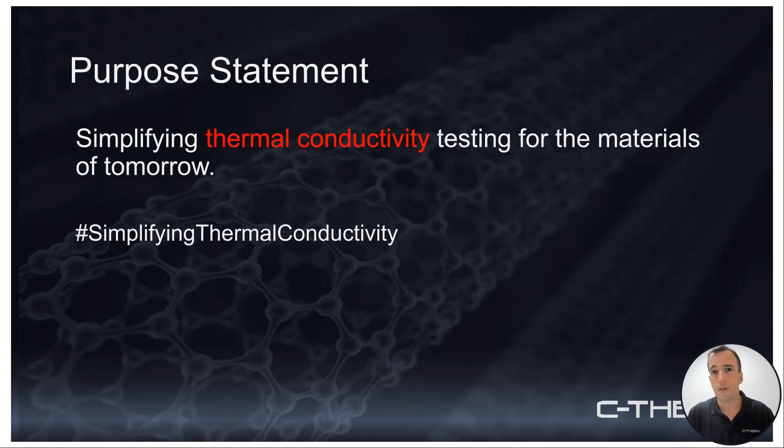Quick overview of our product line. This is not a commercial presentation - we're really going to focus more on the application space, but I just want to give you a little sense of the landscape.

You'll see Trident featured in the middle here, featured quite a bit in the content that Arya will be presenting, specifically the MTPS sensor. Trident brings together the three most prominent methods for thermal conductivity, and a lot of the strength of the product is based in that flexibility and being able to have different options available to you. When we talk about thermal conductivity, it's really important to have more of a toolbox approach - different methods have different benefits and biases or limitations.

Something that's really important quite often for different labs is to have some flexibility, to have some different sensor options. Trident really accomplishes that nicely. You'll see a strong focus on the single-sided MTPS sensor, which is that stainless steel cylindrical sensor to the front right of the pyramid. You'll also see some reference to the TPS flex sensor, which is the yellowish sensor to the left.

This is also great for concretes and really hard materials. You sandwich that in between two samples, and it provides a really complementary means of testing some of those harder materials. So Trident is a research grade product, and it is our most popular product to date.

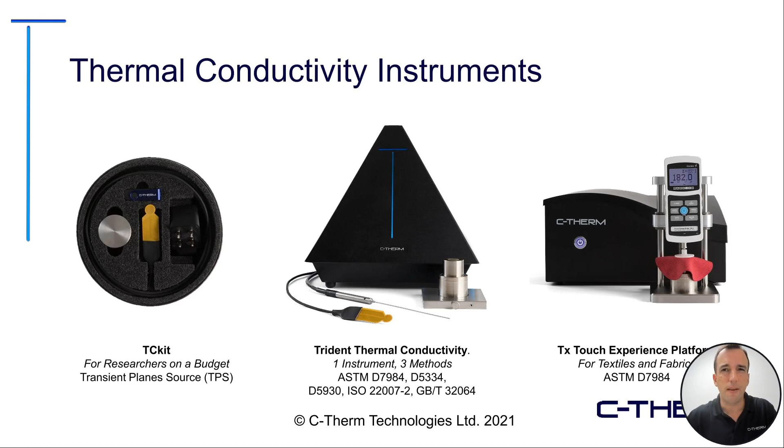There's a researcher in Mexico, for example, that was altering the porosity of some ceramic flooring to try to enhance a warmer feeling for it. Sometimes it's uncomfortable to walk on cold surfaces. So there's a little bit of work done in construction materials, but I think thermal conductivity is the greater focus for most of us in this space.

So we talked about Trident, brings together those three really prominent methods for transient thermal conductivity, all under one platform. This quote from Abraham Maslow really gets to the heart of the value proposition, and that it really is more of a toolbox approach that's necessary.

Maslow writes, when all you have is a hammer, everything looks like a nail. And I think that's something that is easy to fall victim to in thermal conductivity analysis if you just are locked into one method. If you try to test liquids, if you try to test whether it's conductive or insulative materials, a lot of methods will do one or the other, not both. Testing different states of materials, if you're testing phase change materials, this is where it's really helpful to have some different tools in your toolbox to address some of these needs.

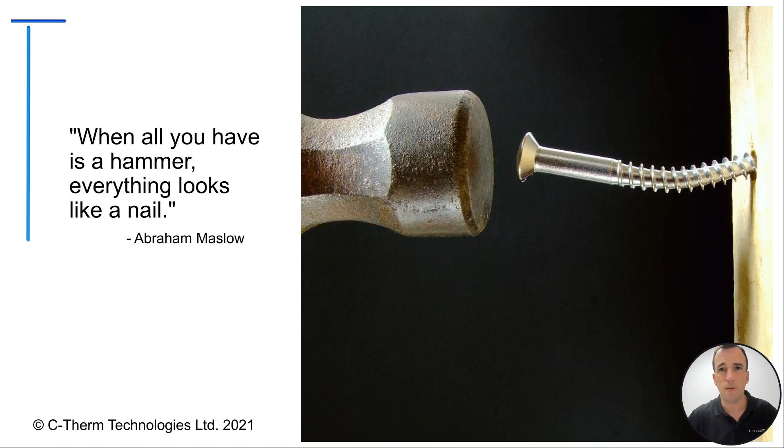So the far left is our most popular sensor. It's the one that will be featured most prominently in today's work. It's an MTPS sensor, modified transient plane source. That's a patented method by C-Therm Technologies. We're the only group that offers a single-sided sensor that can test the full range of thermal conductivity.

We're able to accomplish that with the novel use of a guard ring to ensure unidirectional heat flow into the sample material. It's suitable for testing solids, liquids, powders, and pastes. A very versatile sensor. So you'll hear Arya talk a little bit more about this in his section, and I'll introduce him shortly. The Flex TPS also provides an excellent resource for measuring thermal conductivity.

One of the things I really like about the Flex TPS sensors is they also bring in some additional capabilities for testing thin films and testing anisotropic materials. So if you're dealing with an oriented structure where the heat flow patterns may be different in different orientations, through plane versus in plane, there are some really strong utilities available with the TPS.

And it's available in different size formats. It's 6, 13, and 30 millimeter diameter sensors.

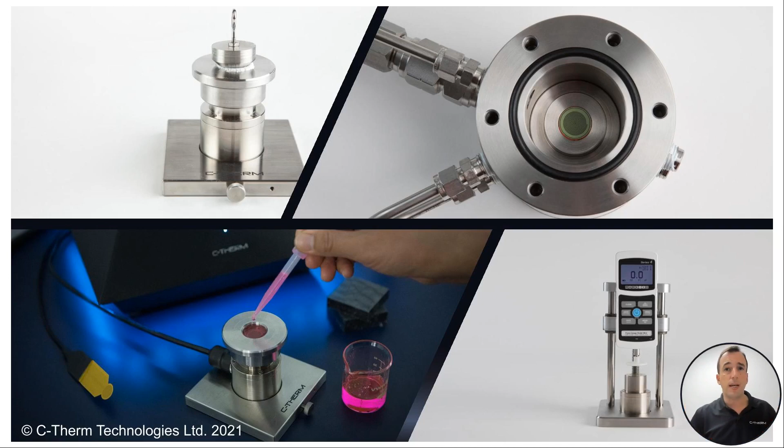So this compression test accessory has a force gauge attached to it, and that helps you provide a very reproducible force load on the sample. There's no prescribed specific compressive force that's dictated with the device. What we really try to advocate in this space is to represent the true test conditions of the sample and the application. That's what you want to try to represent in your test setup.

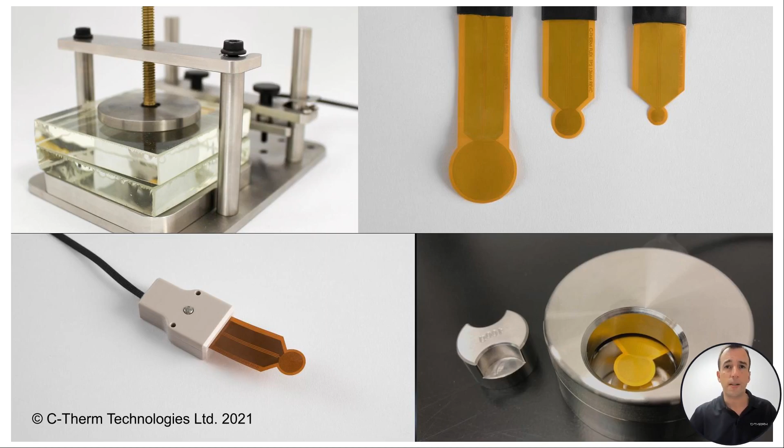I mentioned those utilities earlier available with TPS. Slab allows you to test thinner sheets of material. There's the anisotropy test utility, and thin films, all available with these.

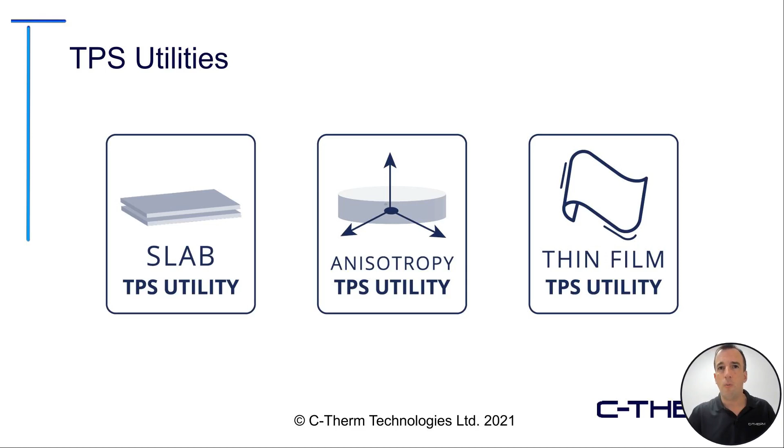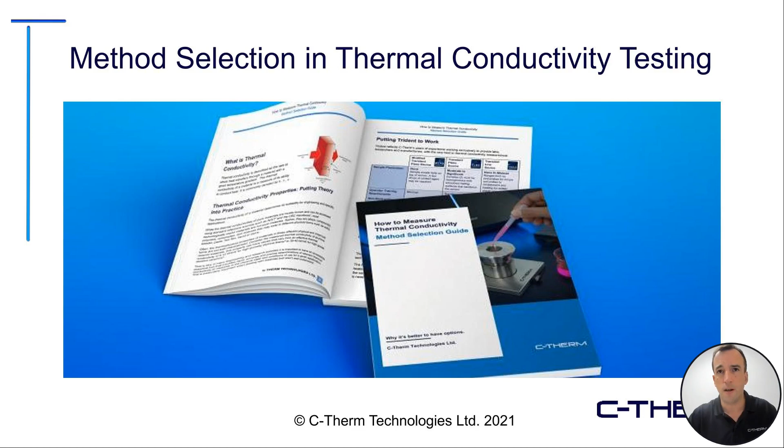It does include some content as well on steady state methods. We don't do a lot of steady state work at C-Therm, but we know certainly in traditional construction materials, you'll see reference to steady state data. I think Arya is going to address that a little bit in his discussion, but the resource guide does also provide some coverage of other methods, including laser flash and guarded hot plate, heat flow meters, etc.

I want to mention a couple of our cooperation partners. We work closely with Metravib and Setaram. These are two French organizations that are global leaders in their respective fields. Metravib is the best at high frequency, high force dynamic mechanical analysis, DMA, with a lot of work in rubber, polymers, composites, different application uses around those.

Setaram provides a really comprehensive line of thermal analysis and calorimetry products from TGA, DSC, TMA, etc. We're very proud to work with both of those. They're both premium brands in their markets, providing really exceptional capabilities, pushing the boundaries of what's capable from a material characterization perspective, and producing a lot of value for their clients. We're happy to work with both of those organizations and representing them in Canada and North America.

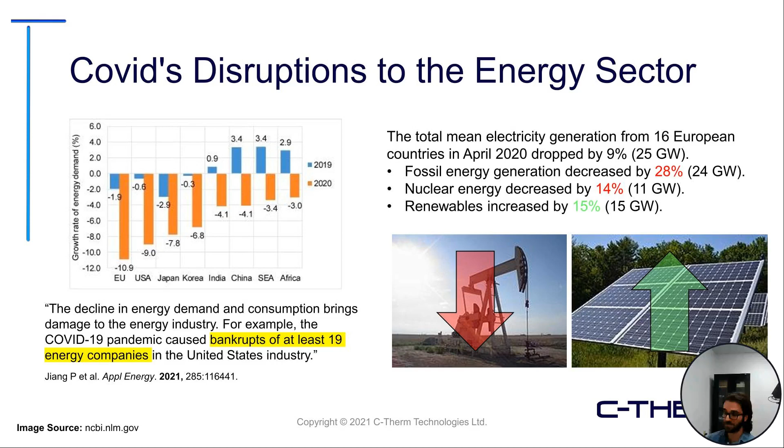Now, while there was obviously a net decrease across the board, you need to take into account some of the things that may impact individuals more. So one of those notes is the cost of working from home. Many people, instead of working their 40 plus hours a week at their company at work, they've been transitioning to a work from home policy.

And if you actually break down the energy costs here, while the overall scheme did decrease, residential energy consumption did show a massive increase, especially during those lockdown months in early 2020. And of course, with the changing landscape, some research here showing about maybe 20% pre-COVID working from home. Currently, there may be around 70%. But even when we get through this pandemic, still a much larger increase of people likely to be continuing their work from home policies.

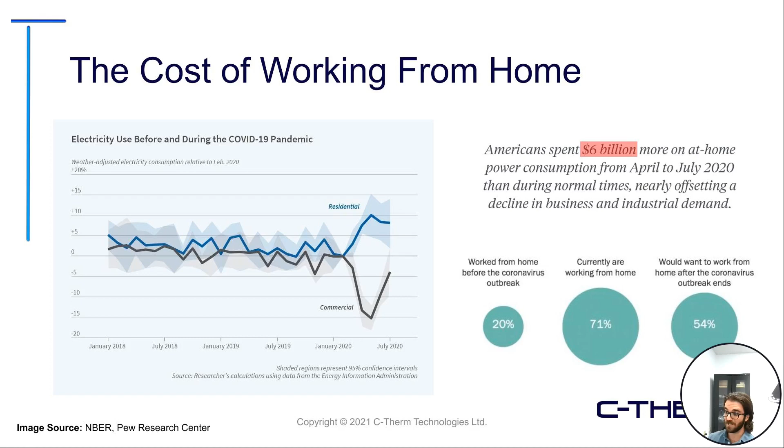So, of course, the energy consumption that you're going to be paying as an individual is going to be much higher when you're working from your house.

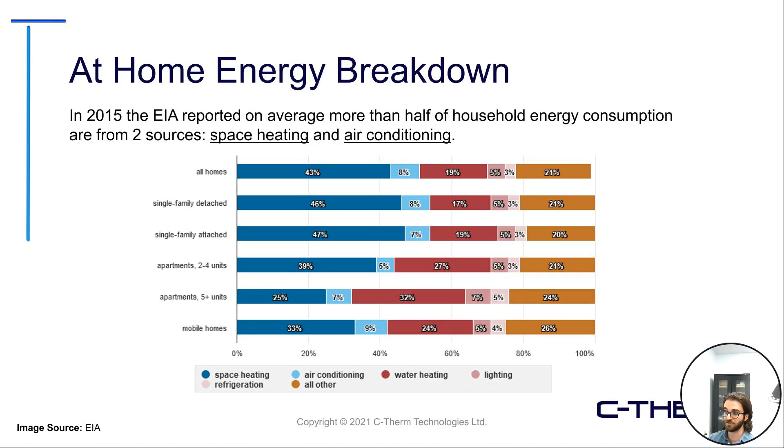So to break that down and understand where these costs are really going to hit you, as an individual consumer, maybe someone concerned with these overall efficiencies - this is a 2015 report from the Energy Information Administration out of the US, showing that about 50% of the overall energy consumption for residential comes from space heating and air conditioning. So this is really just the aspect of maintaining that temperature inside of your home. So obviously, the better the efficiency your house is related to the construction, the materials used, ideally those would be able to offset some of these energy costs and provide cost savings to you at the end of the day.

So let's take a look at a typical house. When we're looking at a building envelope, this describes the skeleton of any building. And when we look at heat loss, there's obviously some variability, but approximately from the roof you can see about 25% loss, walls 35%, windows and doors 25%, and the remainder going out the floor. Of course, depending on the build and construction materials, these can all vary, but this gives you an idea of where your heat loss is coming from.

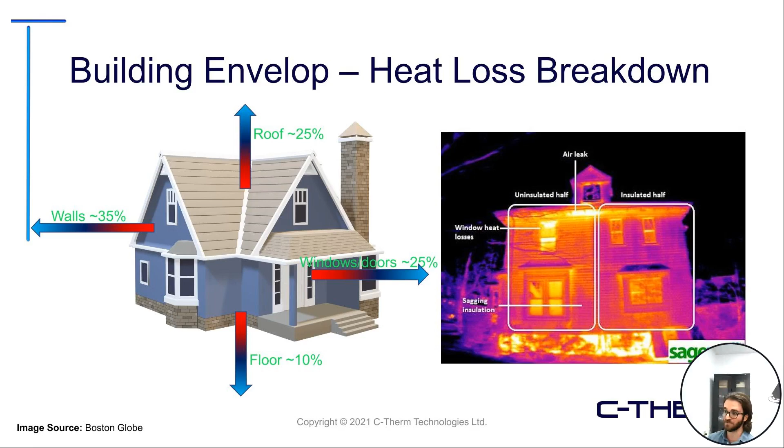You can visualize this through different IR imaging. You can see on the right there, this is an image of a house that's partially insulated, insulated half on the right versus the left. The brighter yellow or whitish areas are warmer, and that's indicative of heat transferring much quicker outside of that house and being lost to the environment. So this is where those insulation considerations come into play.

Now, how does this heat transfer within a material? There are really three primary modes of heat transfer we'll take a look at. Conduction is the first one here, transfer through a material. The classic example is a cast iron pan on a stove. You're heating that up, and if you don't wrap it in a towel and go to grab it, that heat is going to transfer through the bulk of that material. But similar things can be viewed inside a house as well, throughout the walls and the insulation barriers.

Convection is another form. This has to do with the transfer of heat energy by movement of currents, looking at air or liquid samples. But in a building, you can imagine if between your drywall and the exterior you don't have any solid mass or material insulating, that convective airflow inside the wall can actually transfer heat from the inside to the outside if you're trying to maintain those temperature requirements.

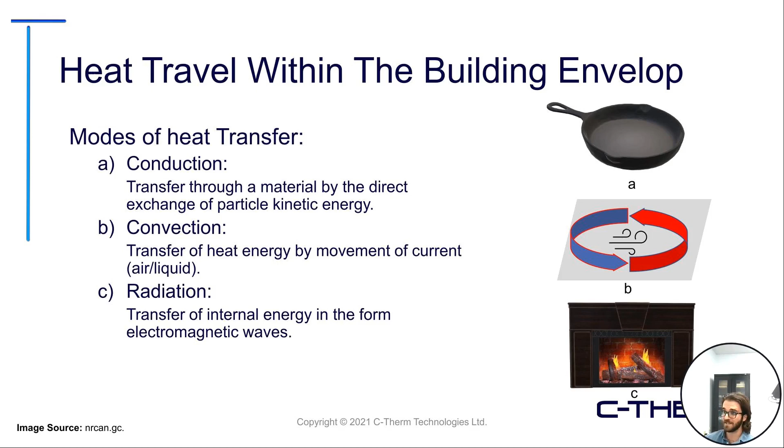And then the last one is radiative heat, or radiation - the transfer of internal energy in the form of electromagnetic waves. You've all experienced this if you've ever sat around a fire and felt that nice warmth coming off in the wintertime. So these are the three primary modes of heat transfer. However, for us today, we're really going to be focusing on conductive heat loss and how that occurs.

In insulation, these different types of materials are all kind of built with the purpose of reducing heat transfer. Common building insulations range, but there's fiberglass, cellulose, foams, to name a few. These can all be in a variety of formats, whether they're a spray foam, bundles or pieces that are placed in, or more rigid boards.

There are lots of different aspects to these types of insulation, but ultimately the insulative capability is inversely proportional to the material's thermal conductivity. So thermal conductivity can really be viewed as a key performance metric. Whenever you talk about a property like conductivity, you need to put a bit of definition behind it, because in this scenario for insulation, lower conductivity values are what we're really targeting.

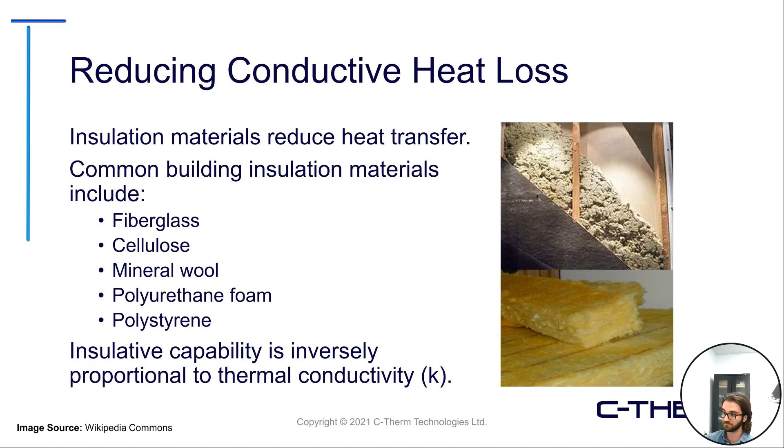So what is thermal conductivity? Not to spend too much time on this, but to break it down quickly, thermal conductivity essentially defines the rate of heat transfer through a material. If you break it down, we have units of watts per meter Kelvin. The watts come from the thermal energy input going through your material. This is going through a given thickness of your sample, denoted by meters, and the Kelvin, or K, as it's done across a material with a temperature differential. This is really the quick high-level overview of conductivity, and we will discuss this in further detail in some of the coming slides.

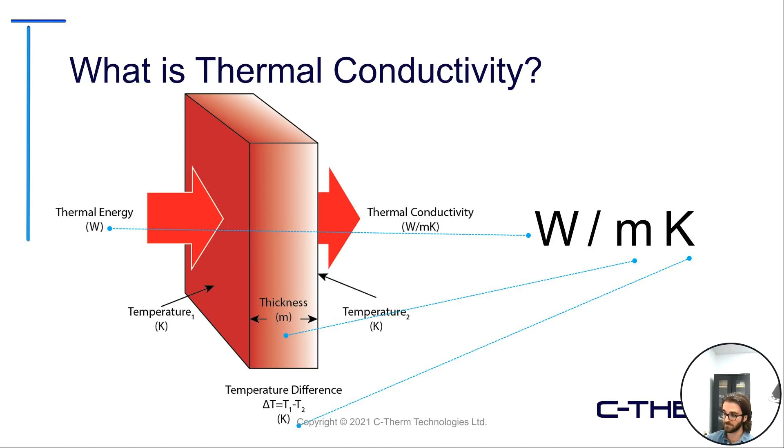But when we're dealing with insulation and different building materials, a lot of the times we'll hear about thermal resistance, either R value or RSI.

So just to explain what that is for those who may not be familiar, thermal resistance is an object property which is dependent on thickness. Conductivity, on the other hand, is an intrinsic material property - essentially irrelevant of the object itself. But thermal resistance is calculated by dividing a given thickness of material, L, by your conductivity value K, so it takes into account the thickness of the material in question.

There are two different versions of thermal resistance: R value, which is the imperial units, and RSI, which is the metric system. So it's always good to take note of which one is actually being mentioned. In both cases, the higher the value of your R value or thermal resistance, the better insulative material or higher performing insulation.

To convert between the two, there's just a conversion factor. If you multiply your RSI by 5.678, you can get to R value. Similarly, going the other way by dividing. So there are ways to convert between them quite easily.

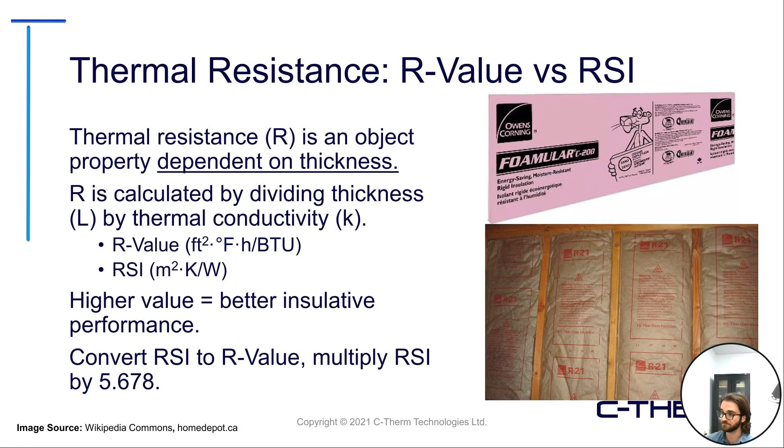So just a couple examples here, maybe a little thought experiment. Thermal resistance, if you're trying to modify this, can really be done in two ways. We notice that resistance is equal to the length or thickness of your material divided by conductivity. Therefore, increasing your R value, your insulative performance, can be done by either increasing the thickness of the sample or decreasing K. So in this example, we're just looking at sample 1 and 2.

Both of these are presumed in this scenario to have the exact same conductivity - it's the same material, but we're noticing that one has twice the length or twice the thickness of the sample. If you were to plug this in, you would notice that solely based on the differences in thickness, sample number 2 has a much higher R value, because we're taking that conductivity and dividing it by a larger number in the denominator. So obviously this is going to give you that change in R value.

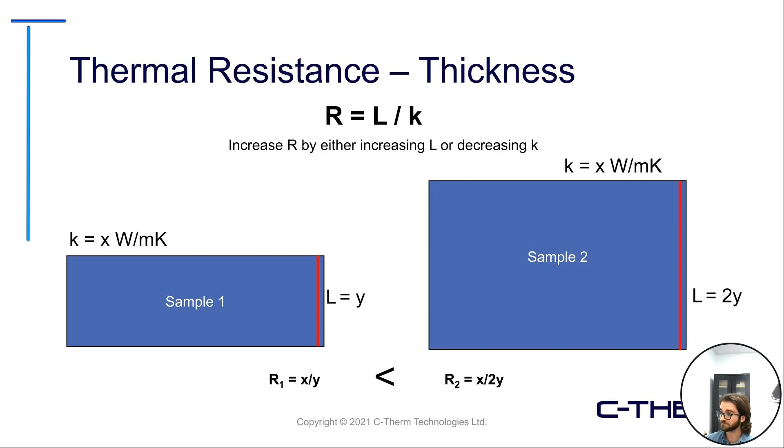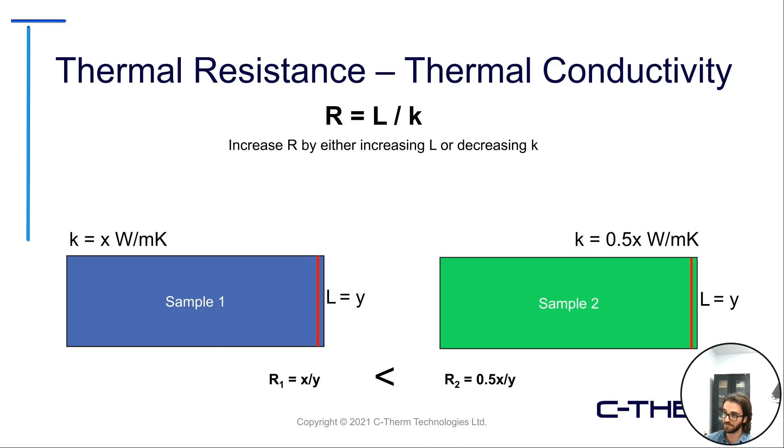Up next, we're taking a look at the thermal conductivity changes in your thermal resistance. In this setup, we have two different samples, and in this case we're actually looking at the effect of the conductivity value changing. Similarly, based on the differences in the thermal conductivity in this scenario, the lower thermal conductivity is going to result in a higher R value.

Now, Adam did mention earlier there was the mention of steady state. Obviously this is widely adopted in the industry as a long time standard. Steady state heat flow meters really benefit from the use of the ASTM C518 methodology. It's a very high precision device, excellent for those lower conductivity samples.

Of course, there are a few drawbacks here. Generally a little bit more rigid sample size requirements and geometries, and longer test times. You are measuring over a much larger area based on the sample requirements, so you lose a little bit of that spot-to-spot variability that may be present in a material. Generally a steady state setup, shown on the right, has a hot plate and a cold plate with your sample in between, and you're measuring the heat flow through that material once it reaches steady state conditions.

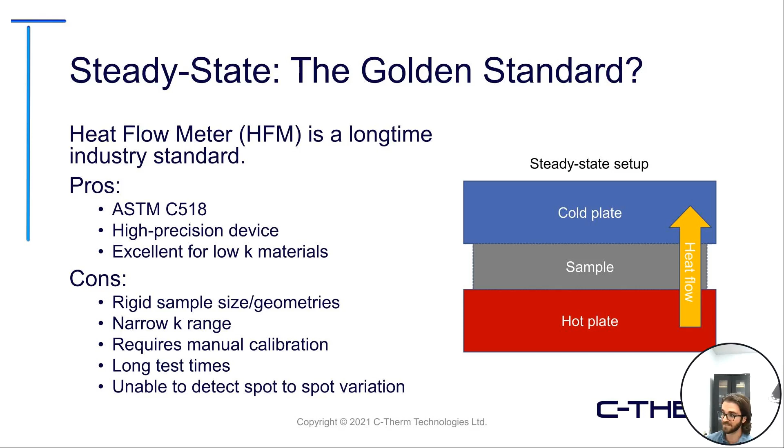So obviously we're really focusing in on different transient methods. Adam went over these a little bit earlier, but on Trident there are 3 different options, all of which really provide much faster test times. As an example, the MTPS gives you measurement times of about 1 to 3 seconds, depending on the samples you're working with. They provide options for more representative testing conditions - these sensors can be placed in varying temperature, humidity, and pressurized environments for this type of test.

And really, at the end of the day, this can act as a complementary method in tandem with some of these steady state methodologies. Because of the rapid testing aspect of transient methods, it can really lend itself well to dealing with high sample throughput, where you're dealing with large sample volumes and need rapid testing. Everyone knows time is money at the end of the day. So whether you're in the R&D stages, QA, QC, these transient methodologies can be adopted to help speed up your screening process, finding the materials that are generally more conductive or less conductive depending on the end use application. Then, later on down the road, if the industry standard requirements need C518 testing, you can work with those in tandem.

Just as an example, here are some measurement comparisons taken on a few different foam insulation samples. We see heat flow meter data in orange and MTPS data in blue. Across all tested samples, including a couple of foams and the NIST EPS standard, thermal conductivities were well within 2% of each other.

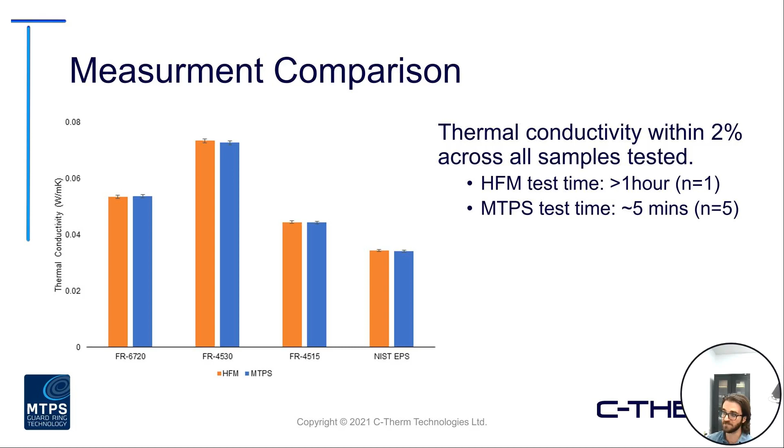All right, now onto the interesting stuff. These are a few case highlights, a lot of which were actually just recently published within the last few months or last year. So we're diving into some different ways the sensors, the MTPS in particular, have been used to do some of these novel characterizations.

This first one is a study coming out of Vietnam and Singapore, a joint study on applications of using material, in this case pineapple waste, for the development of an aerogel sample.

So really using these bio-based engineering applications and reducing and repurposing otherwise waste materials in a more efficient way. The idea behind this study is really to reduce the environmental impact of some of these waste products.

If you break down global greenhouse gas emissions by sector, the agriculture industry accounts for about a quarter. If you dive into this, a lot of that portion really comes from the fact that you have to burn off a lot of the waste products that aren't used.

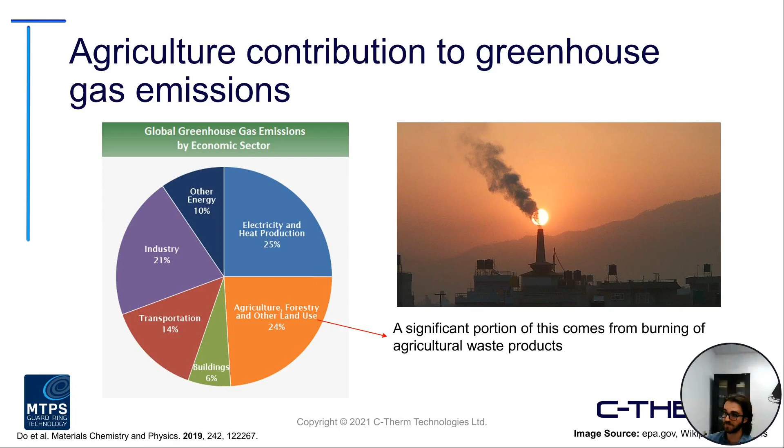So you can imagine that when you're harvesting a product, not all of that material may get packaged up and sent to grocery stores around the world. Some of it goes through different processing techniques, and there can be an associated amount of waste that is present. The one they looked at in particular was pineapple waste.

If you dive into it, it was surprising to note, but if you break down a few waste sources - the crown, the peel, the seeds and core - in some cases you get about 50% of the product itself as waste. So when you imagine going to the store and buying that inside a package, all peeled and taken care of for you, what you're not seeing is where all the other pieces went.

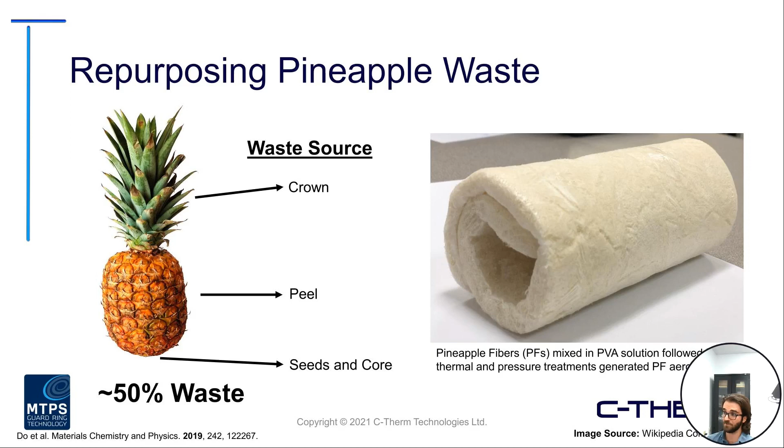So in an attempt to reduce some of that waste, this group took these pineapple fibers, known as PFs, mixed them with a PVA solution, did some varying thermal and pressurized treatment, and essentially created these aerogel blankets that you can see rolled up on the right there.

As Adam mentioned earlier, air is a really great insulator. So if you have more material there, that provides more routes for heat to transfer within the bulk, resulting in a net increase in conductivity. So what they noticed is the lowest PF concentration, the 0.5%, had the lowest effective thermal conductivity measurement, and therefore was the most insulative in nature.

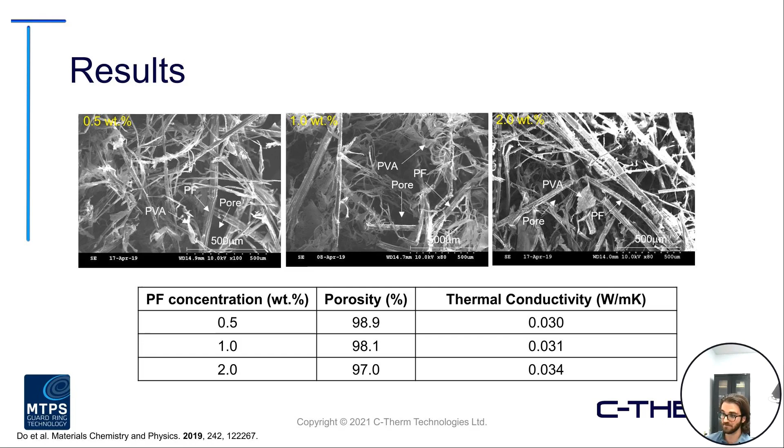So they were able to conclude, based on these initial results, that these pineapple fibers are a great option, an eco-friendly alternative building block for some novel insulation materials. They exhibited extremely low densities. There were also some studies not presented here showing good mechanical strength, and of course the metric we're interested in is the low thermal conductivity. And this is just on one product, pineapples.

So you can imagine the other potential sources to reduce some of these high waste areas and repurpose them for similar applications, or even other applications in the future. A great area of investigation done on this bio-based insulation.

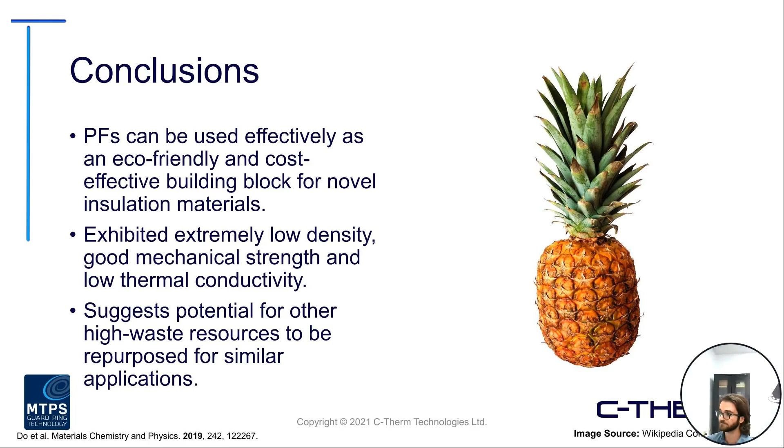This next study was done on phase change materials for thermal energy storage in buildings. This is coming out of work done in China, and we'll dive into this one. They did a lot of interesting studies on PCMs.

If you look at a generic PCM life cycle, starting in the solid state, you increase the temperature and that PCM will absorb the thermal input and begin to melt. As that continues, it enters its liquid state. Repeating the cycle, once the temperature starts to decrease, the PCM releases that thermal energy to the environment and goes back into the solid state. That's essentially the cycle it will run through.

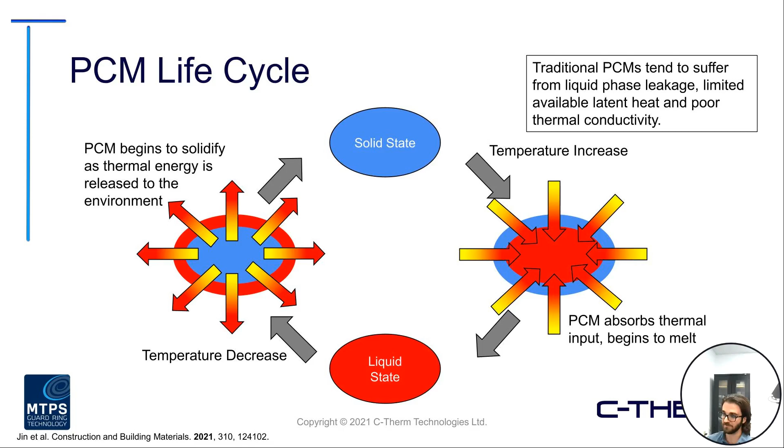However, traditional PCMs, while they have these very unique qualities, do tend to suffer from liquid phase leakage, limited available latent heat, and generally poor thermal conductivity. So what these researchers were aiming to do is improve the overall performance of capric stearic acid, which was their PCM, using a montmorillonite substrate to act as an encapsulant to help contain that PCM during the transition. On top of that, they wanted to incorporate graphene to enhance the thermal conductivity properties of this sample. So it was twofold: reduce some of the leakage effects and also improve the thermal properties.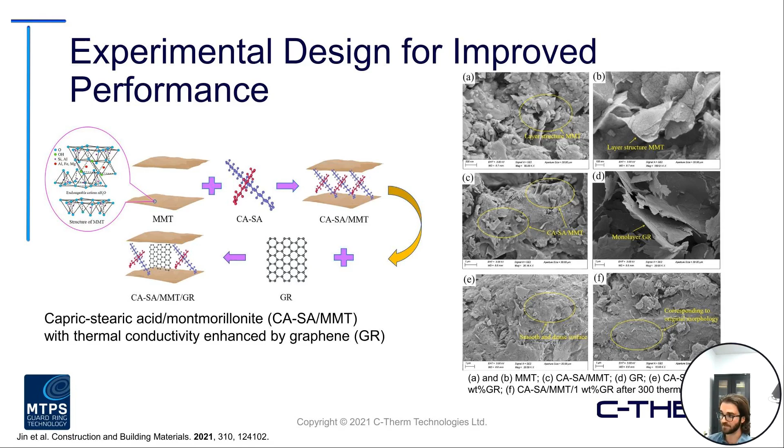What was really interesting is in the image to the right, after 300 thermal cycles, the morphology remained fairly constant. So when it went through that melt-to-solidification cycle 300 times, it still maintained its form quite well, really lending itself to good thermal cyclability.

Then we look at some of the results obtained. First on the left, thermal conductivity. As was somewhat expected, as you introduce new components - even just going from 1 to 2, where 1 was just the base PCM and 2 is noted by the introduction of the MMT substrate - MMT noted a marked increase in the conductivity measurement. The following 3, 4, and 5 are continual increases in the amount of graphene added, so you can see this clear trend of increasing thermal conductivity.

Once they prepared these samples, they did various thermal imaging. On the right, looking at column A around the 240 second mark, you can see that through increased graphene content, that material goes into the liquid state much quicker. Going from blue to that reddish white, you'll notice the highest concentration graphene was able to transfer that heat much more efficiently throughout the bulk of the material.

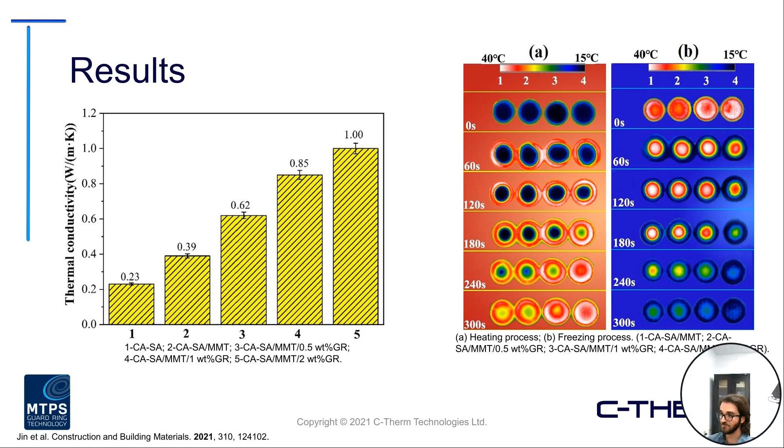In conclusion, they found that the CA, SA, MMT composite PCMs demonstrated excellent cyclability. They did a lot of study on DSC and various calorimetry properties that aren't really highlighted here. Phase change temperature was in an ideal range, and they noted increased higher latent heat. That latent heat is an important factor when considering thermal management applications, or heat storage, within the building envelope if you were to incorporate these. The graphene additive really improved the heat transfer efficiency - while you need to maintain heat storage, you also need to make sure it's transferring efficiently within the bulk, and that's what the graphene showed and accomplished. In the end, they concluded it exhibited great promise for application in a novel building material.

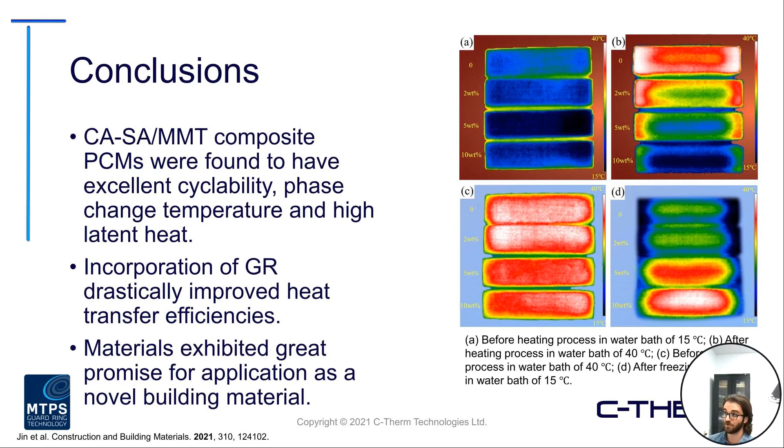The images on the right were them taking that PCM at the highest graphene weight loading, adding it at different weight concentrations inside a brick and mortar, and doing various thermal imaging studies. Again, what they found is that based on the higher latent heat capability of the PCM, it really allowed a reduction in heat loss that was occurring on heating and subsequently on cooling inside that building brick sample.

All right, so this next one is on a characterization of earth mortars, stabilized with a very interesting additive. It's an AEA additive, and we'll get into this. This is a paper published by a group in Brazil, presented at the ICBBM, an international conference on bio-based materials this past year.

So an earth mortar - first, what is a mortar? These are paste-like materials that help bind building block materials together. You can see in the image on the right, the mortar is that paste you'd apply between the bricks in order to connect everything together.

Now, earth mortars in particular have gained attention because it's an environmentally friendly alternative using more naturally occurring materials, with lower environmental impact while still having really great efficiencies and durability ratings.

If you look at any type of material consumption used for the production of anything, you can see in this graph in the bottom left there's a lot of considerations to take into account - how much water is used in production or extraction of that material, the toxicity levels, the effect on climate change. So you can make a well-rounded map of what environmental impact that material will introduce if you're deciding to use it in your process.

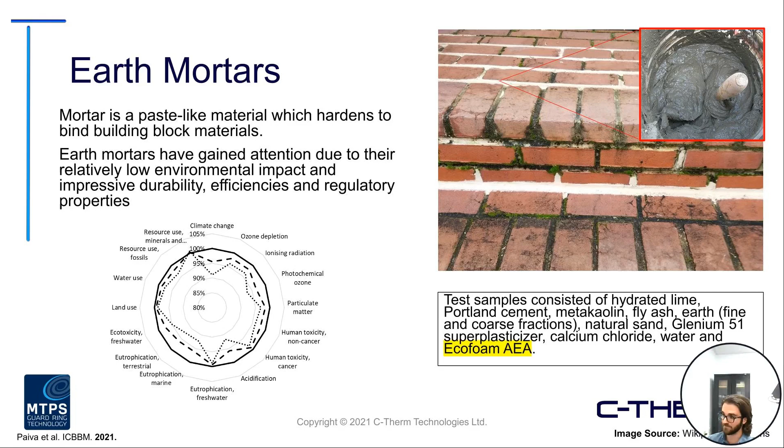So to help improve on some of those aspects, these earth mortars were mixed with the following ingredients, which you can see on the right: fly ash, natural sand, cement, to name a few. But the one I want to draw your attention to is the EcoFoam AEA - a very interesting material I'll talk about a bit here.

So an AEA is an air entraining additive. What this does is introduce microscopic voids or air bubbles inside the sample as it cures and dries.

In this study, they had 4 different earth mortars with varying concentrations of that AEA additive, aiming to do thermal characterizations and also some structural and mechanical testing.

From a density perspective, which you can correlate to air content, as expected, increasing the AEA additive decreased the effective density of the material while increasing the total air content present.

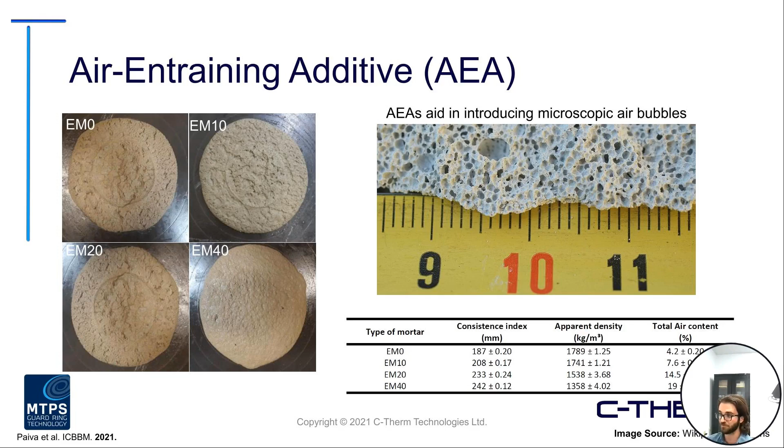As an end result on the dried product, you can see SEM imaging showing micropores present inside the sample bulk, increasingly more with increasing AEA content. They did note significant cracking, as you can see in all of these SEM images - this is something that needs to be taken into account.

But from a thermal aspect, going from the top right, which was the earth mortar with no AEA additive, all the way down to the highest concentration in the bottom left, you get a noted decrease in both conductivity and effusivity, trending the same way.

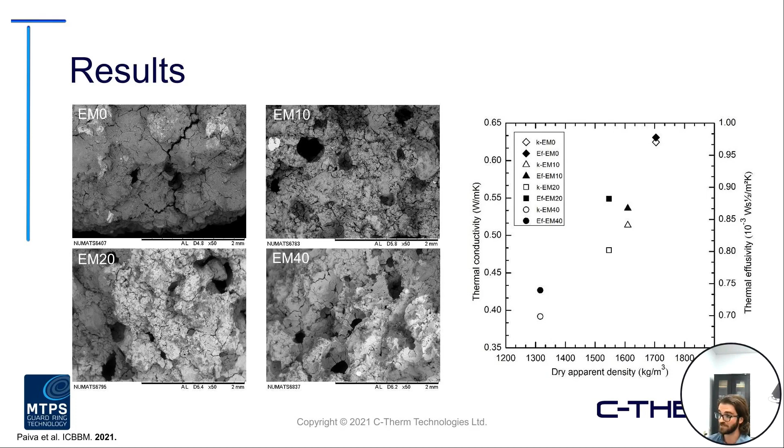So in conclusion, they were able to use this AEA in the earth mortar mix to increase air content by a significant degree, with a corresponding net decrease in density. This all added into improved insulative performance, increasing by upwards of 23%. So increasing insulation performance means decreasing conductivity values.

As a note, they did find that at that maximum loading, because of structural aspects, the highest weight loading decreased the overall mechanical strength by 89%.

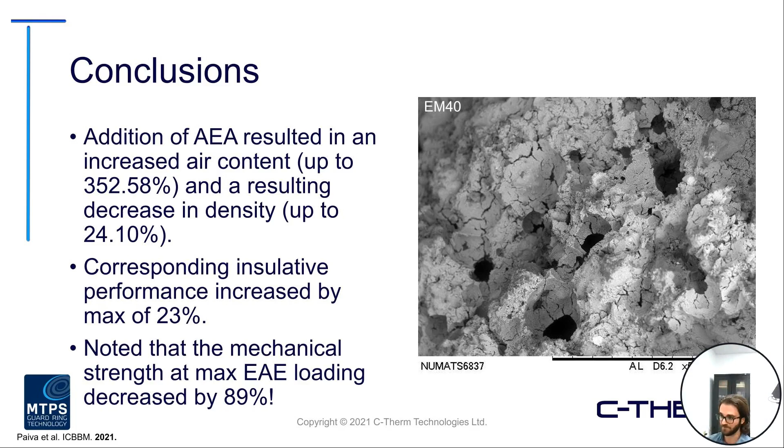So of course, there are various aspects you need to consider when developing these types of materials. We're obviously focused on the conductivity side of things, but there are a variety of other variables that need to be taken into account as well.

This next one is on a ceramic brick made from a zeolite, poor rock, and sawdust mixture. This is again another study where you're taking otherwise unused or waste products and repurposing them. This is from a study coming out of Hungary.

In this work, we previously looked at the mortar, what was keeping those bricks together. Now we're looking at the bricks themselves. Traditionally, a brick was denoted as a material composed of clay. Nowadays, varying material compositions are defined as bricks - really any kind of building block.

But ultimately, the goal of this study was to reduce the use of clay while simultaneously contributing to a safe disposal alternative of some of these waste products. Clay harvesting does deplete natural resources in those areas by quite a significant degree. So there are actually some areas around the world which will put limitations on how much clay can be extracted from a certain area because of the negative environmental impact.

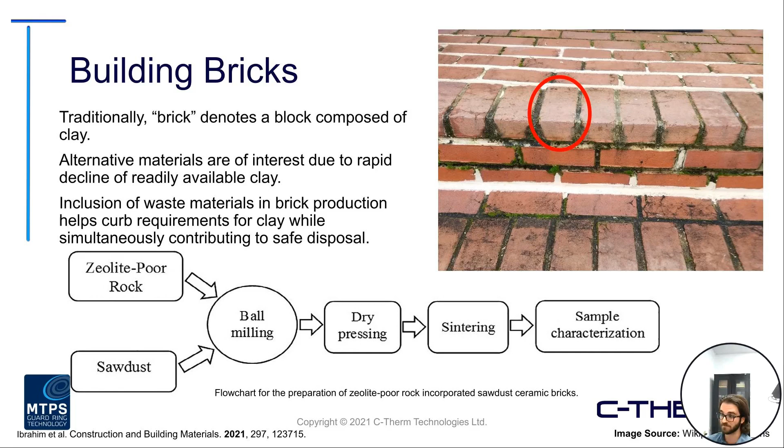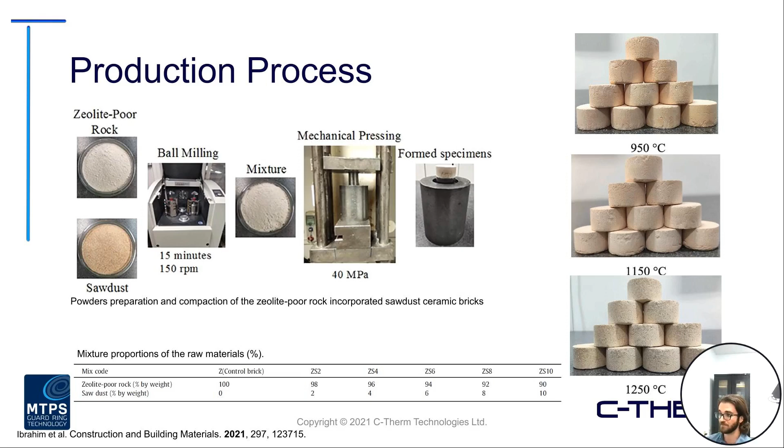So in this study, you can see the flow chart. They are basically mixing this zeolite material and sawdust, going through this process, and then characterizing the end samples that were developed. The production process involved taking those powders or materials and ball milling them, creating this mixture, and then pressing them into these cylindrical brick-like samples. You can see here that they went through varying compositions. So your control, which was all zeolite, sawdust, and then slowly started gradually increasing the amount of sawdust present inside the overall sample itself.

From the results, we see some SEM imaging on the left, but the story we want to take a look at here is the varying sawdust concentration was noted to have a net decrease in the effective conductivity values, as seen on the right. But they're also firing these bricks, or sintering them, at different temperatures. So once the brick has been made, you heat it up, basically dry it, and then take that out and test as needed. So there was also an influence that we can see quite notably on the influence of the sintering process on the effective thermal conductivity results as well.

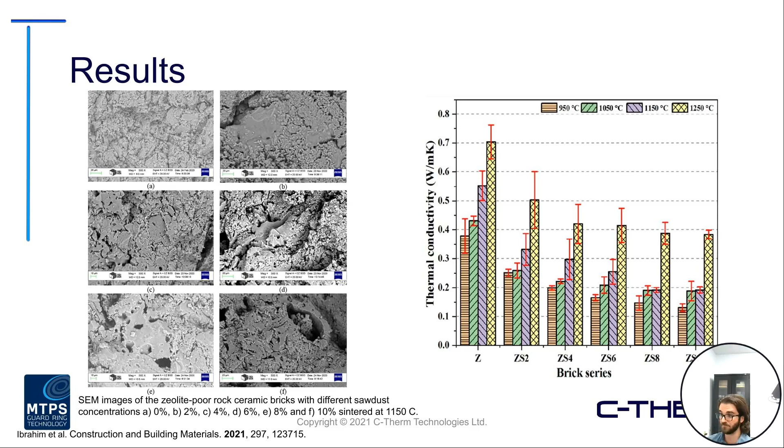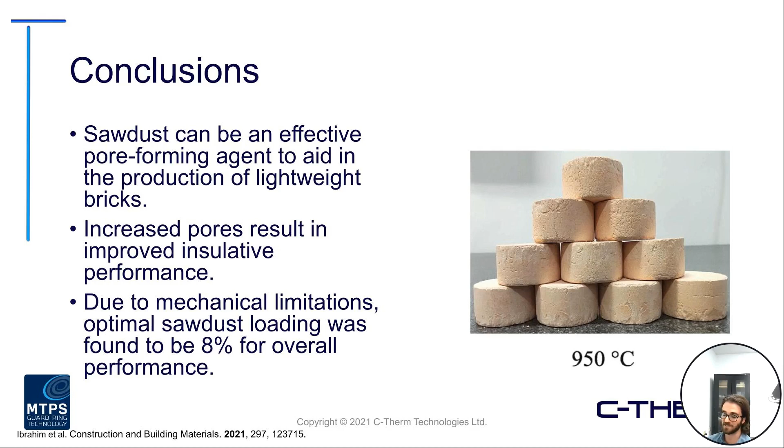What they were able to conclude was the sawdust essentially acted as an effective pore forming agent within the sample to really help produce these lightweight bricks. The increased pores, as we know, increasing pores, increasing air, therefore improved insulative performance was noted here. Again, they did varying other tests. One of the mechanical limitations, they found that optimal sawdust loading was at 8%. When you take into multiple factors, that was their optimal weight loading. And the sintering at the lowest temperature, so at 950 C, that actually resulted in one of the more fragile end products. So they were aiming to basically use a high sintering temperature with a specific weight loading of sawdust to get their optimal performance out when you take into both thermal and mechanical considerations.

And then this one here, this was a neat one that we found. This is on a brick fabrication using 3D printed technology with an aerogel additive. So this is some work coming out of the United States, University of Akron. This one, for any of you who like playing with Legos, or if you have kids that like playing with Legos, you'll get a kick out of this. They basically designed these 3D printed materials with these Lego-like structures.

The idea here was generally, while very insulative in nature, pure aerogels can be very brittle, damage quite easily, sensitive to moisture. So incorporating the aerogel additive into the polymer matrix in this fashion, you're able to fine tune and tailor those properties to what's needed as your end use. So you can see the overall process that was used here in the SLA printing technology. They had various different materials, so polyimide, aerogel SLA, and epoxy, varying concentrations across the board there you can see on the bottom.

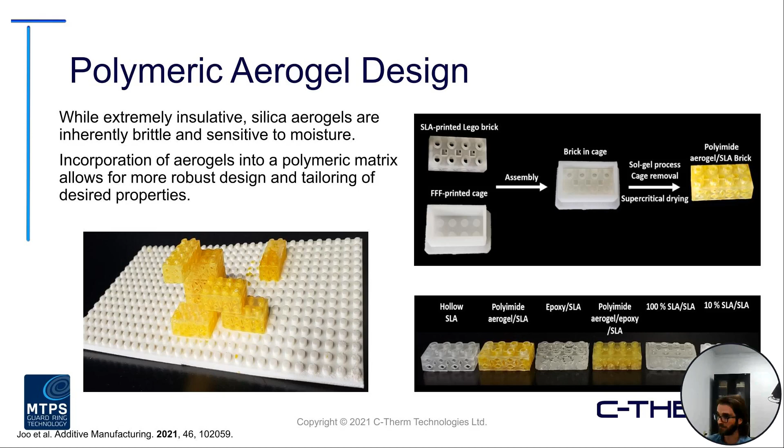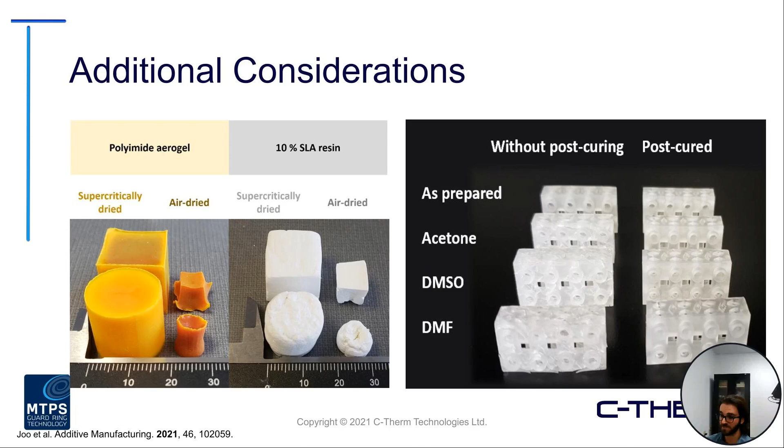A very well done paper, I will say. If you have a chance to go through this, they had a lot of different studies and aspects of the material done. They looked at drying process, post-curing with different solvents. Obviously, a lot of considerations were taken into account here for this study, but at the end of the day, looking at those final thermal conductivity results, and again, some supporting SEM imaging on the left, they were able to see that in all cases, fairly low thermal conductivities were obtained.

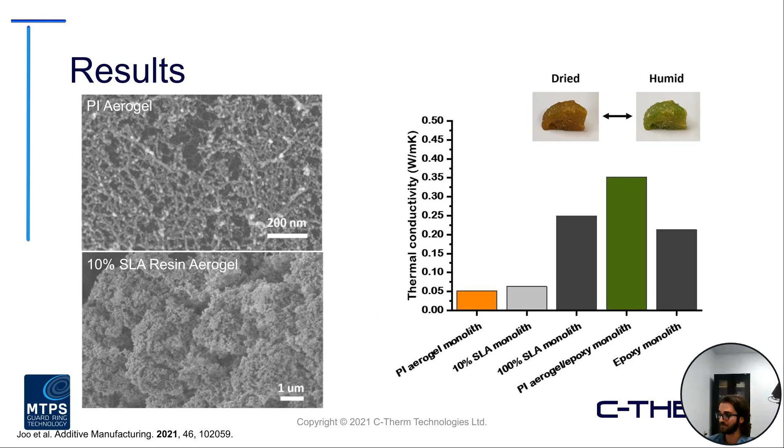Of course, the PI aerogel monolith denoting with the lowest effective conductivity. As you increase that polymer component with respect to the aerogel amount, those properties do change, and we see that net increase. But across the board, fairly low conductivities were observed.

In conclusion, they were able to really highlight the capability of producing these modular polymeric aerogel bricks with this 3D printing technology. So lots of interesting work coming out with 3D print AM processes. The aerogel contributions really accounted for that improved insulative performance, whereas what they were able to show, again, not noted here explicitly, but the SLA resin really provided a structural strength that benefited from the mechanical side of things.

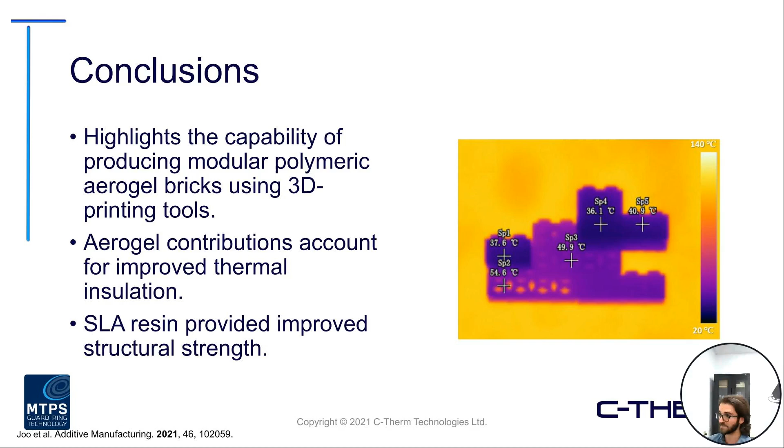And then just some, again, a lot of these papers all having these IR or temperature imaging images done, and we see one there on the right where they stack some of those Lego-like blocks together.

And then finally here, just before we wrap up, this is kind of an internal application highlight on some cements and concretes. All of those papers that we just went over are all using the MTPS method.

So just to take a look at where TPS can come into play, it's really useful if you're dealing with a material that's hygroscopic in nature, so maybe it would absorb or react with water. Some materials may require a contact agent with MTPS, and therefore TPS can be a viable alternative if there are compatibility constraints. It has an overall very flexible design. It's a little more complex to operate than the MTPS, but still provides measurements much faster than steady state counterparts.